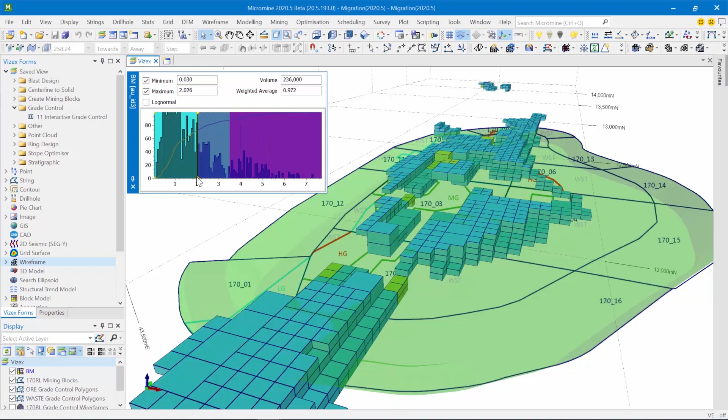Hello, my name is Andy, and today I'm pleased to give you an overview of some of the new features that are included in the interactive grade control tool, which is available for you to enjoy in Micromine 2020.5.

So the first thing I'd like to show you is the new forms and the improved workflow. Here's my grade control toolbar, and the first thing you may notice is that the setup is now split up into two options. So you have the setup for polygons and you have a dedicated setup for wireframes. So let's go through the setup for polygons.

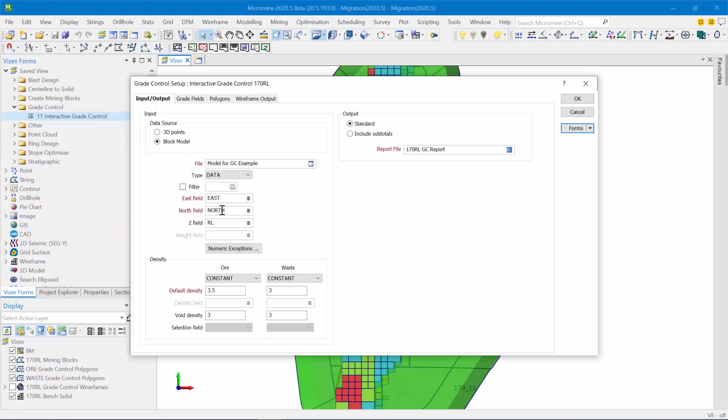I'm going to use a Micromine form set to save me some time so that I don't have to repopulate a lot of these settings. This is something that I'm sure a lot of Micromine users are used to utilizing. Let's proceed to the grade fields tab where the first new feature can be seen.

At the bottom of the grade fields tab, we have these options because now you can define a material bin set. A material bin set allows the user to define different materials. So imagine you have different material classifications and you want to be able to interrogate the block model and report on each one of those material bins. A material bin set allows you to define those material classifications and then use them in the interrogation process.

So here I've got three material bins. Sorry, I've got five material bins actually. My ore is broken down into low grade, medium grade, and high grade, and then I have waste. So my report will be broken down so that I get to see the reserves for each one of these materials.

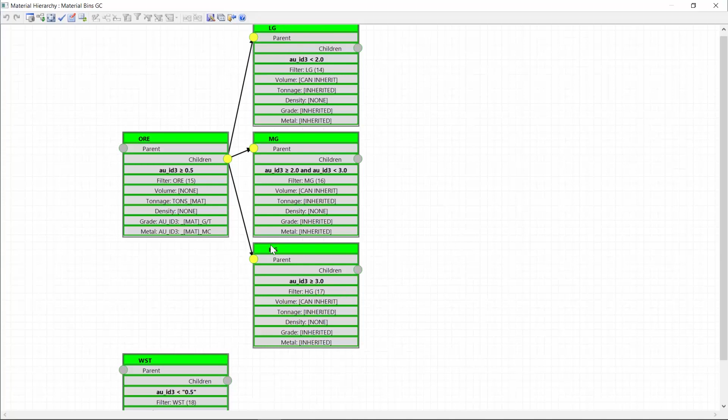Before I leave this window, I'll just show you that we've got some new options for writing additional attributes to the output wireframes, which is one of the primary outputs of this tool besides the report. So you have the ability to write a wireframe attribute for void, as well as the average density of the material, as well as labels and a series of other attributes.

So one of the things that I didn't mention before was that when you define a material bin set, Micromine will create wireframe attributes that correspond to the reserves of each material bin and write them to the output wireframes that are generated. And I'll show you that in a minute.

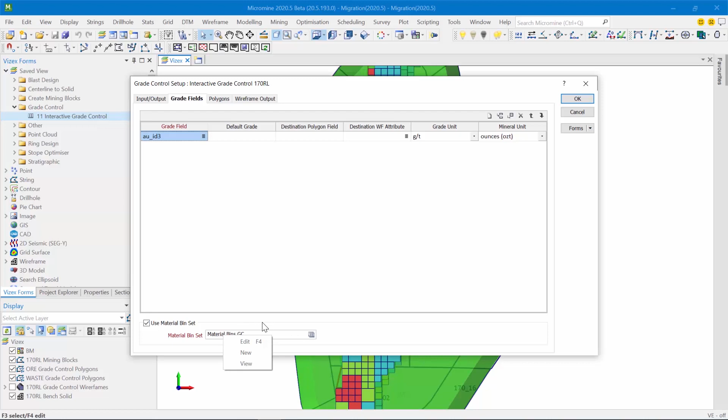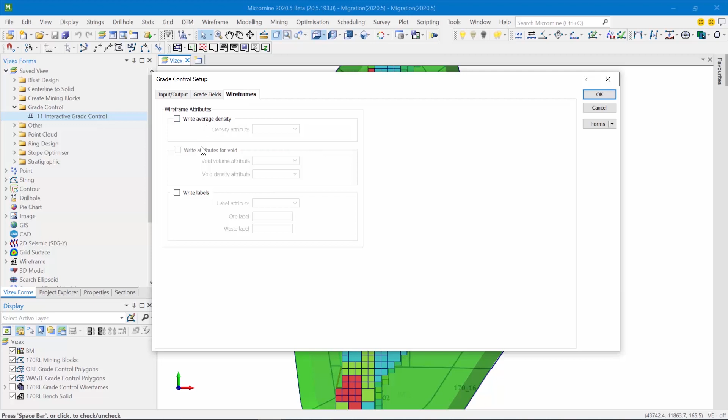So I'll close this form and give you a quick look at the wireframe setup. It looks predominantly the same as you can see. Down here in the grade fields tab, we have a material bin set, and we don't create wireframes in this process because the inputs are wireframes, but you have the ability to code those wireframes with additional properties from the run if you'd like to do that.

So now that I've given you a quick overview, let's go and set this up. So in my example, I've gone through and delineated my grade control dig blocks for all the mining blocks on the 170 bench. And as you can see, I've got my low grade, medium grade, and high grade control blocks. And in some cases, I've delineated the waste blocks as well. So I'm dealing with polygons in this case.

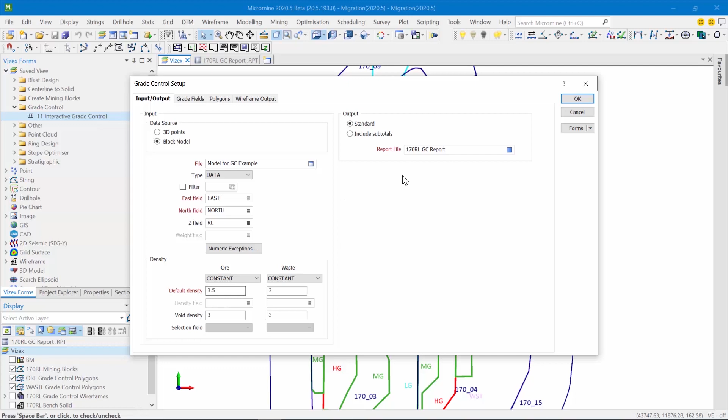So I typically go through to the polygons setup form, define my 3D points file or block model, as well as all my parameters for density, report file name, and so on. As you know, I've done this before because I loaded a form set. I've defined a material bin set for this case, and I've asked Micromine to generate some wireframes as one of the outputs. I'll click OK. I'm happy to overwrite that report file.

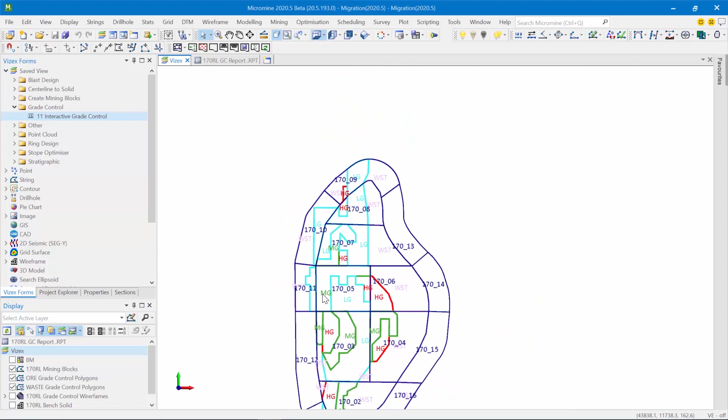Now typically you run a report for one mining block, but I'm going to show you how this can be used to quickly run a report for all the dig blocks or grade control blocks for all the mining blocks on a given bench, because this is a nice fast way of doing things. So I'll hide all my waste polygons or grade control blocks, however you want to call them, and I'm just going to hide my blast masters or mining blocks.

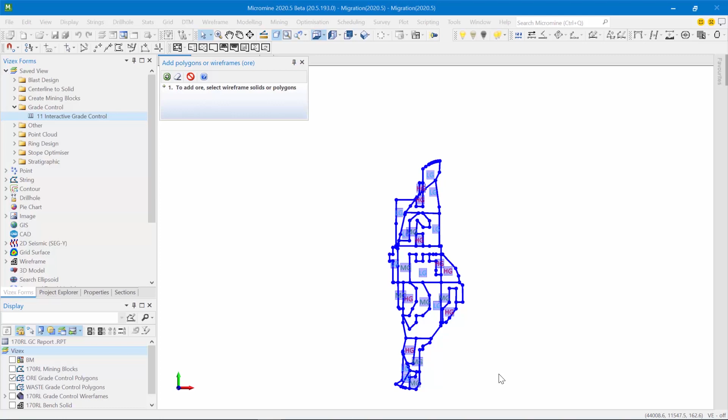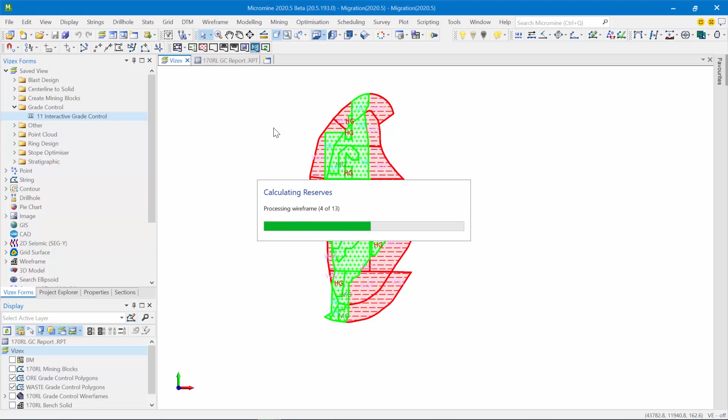So what I'm going to do now is tag all the ore. Select everything except your selection. Now I'm going to hide these guys and pull up the waste, and I'm going to tag all my waste. So now I've tagged all the ore and all the waste. And now I can just click on this generate report, and Micromine will interrogate all these polygons and generate a detailed report where things are broken down by material bins.

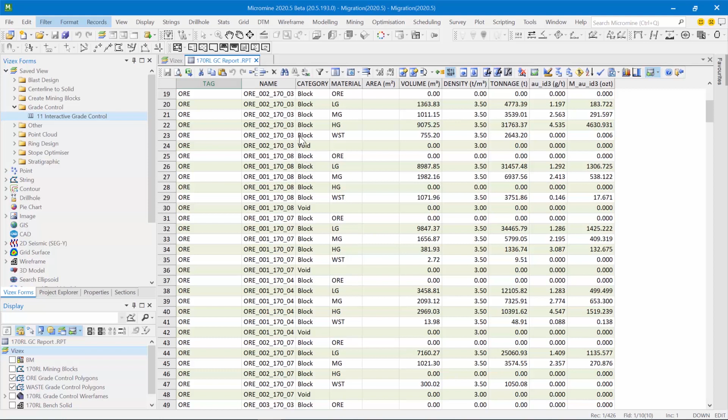So as you can see, for all these mining blocks, for each mining block, the function is reported on the reserves of each material bin. So there's the 170.08, 170.07. As I said before, you might not like to do this for all the mining blocks or all the dig blocks on a bench, but I just thought I'd show you this method because it's something that you can use to quickly run reports on everything on a given bench if you'd like.

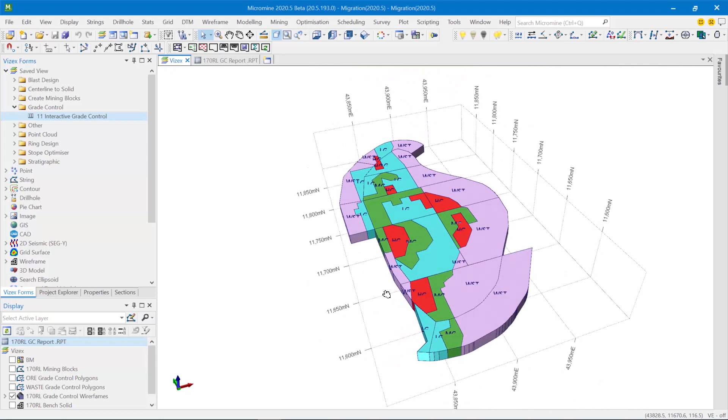Now, before I continue, let me show you the wireframes that Micromine can produce for each one of those polygons. So in this case, Micromine has gone through and generated these wireframes. And if I click on a wireframe, as part of the material set definition, you can see that Micromine has generated a series of wireframe attributes corresponding to the reserves that it calculated and written them onto each one of these wireframes. So this is really good because you can use these wireframes for various purposes such as scheduling or reconciliation or reinterrogation if you'd like to do something like that.

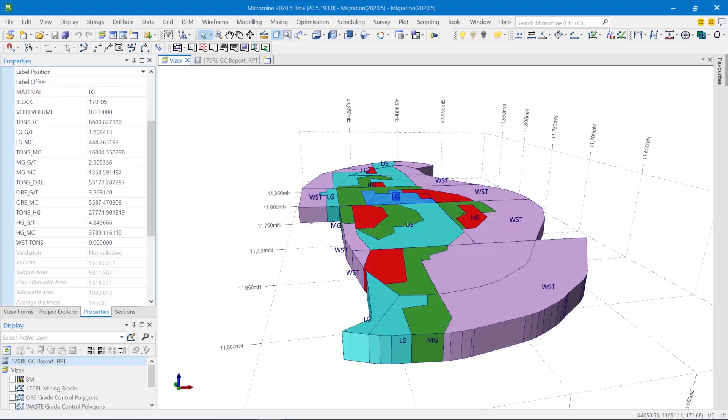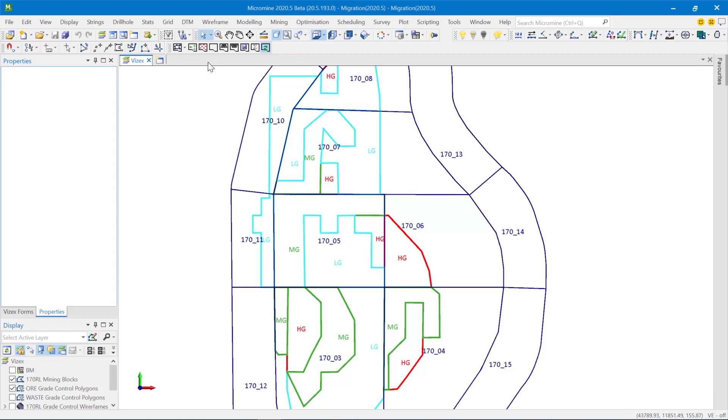So the next thing I'd like to show you is how you can use this auto update report. So right now it's enabled, and what that does is allows the report that's generated after each run to be dynamically updated as changes are made to the design. So let me demonstrate that. In this example, let's look at the 170.06 mining block where I've got a high grade control block within that mining block. So I'm going to tag that as ore, and I'm going to generate a report.

There's my report. Now let's say that I realized that this grade control block wasn't quite right, and in fact the high grade doesn't end there, but maybe ends there. Something funny like that. Now as you can see, the report is dynamically updated. Now let me just do a quick undo. Again, the report will be dynamically updated.

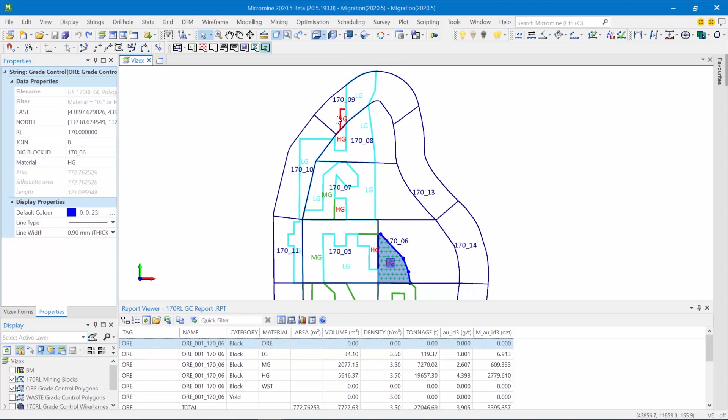So the benefit of that is that you can quickly see the implications of changes to the designs in your reserve reporting without having to go through and set things up again and tag things again. It's quite a neat feature, and it can even be used in blast design where you're designing your mining blocks and you want to see the implications of variations in the geometry of the mining block on the reserves in each mining block.

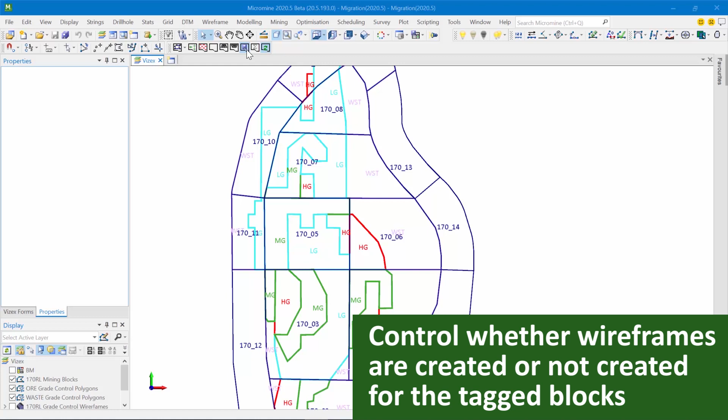So a couple of other things to show you. This toolbar over here allows you to control whether wireframes are created for the tagged blocks or whether they're not created. So sometimes you might just want to avoid creating these wireframes until you're completely happy with your grade control blocks, in which case you would have this disabled. But when it is enabled, wireframes will be produced as the report is generated.

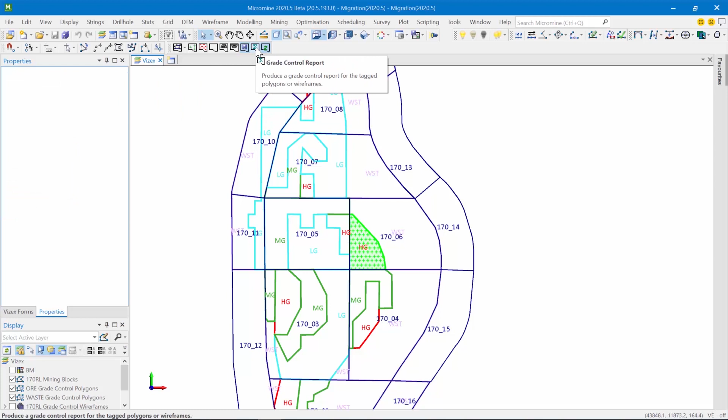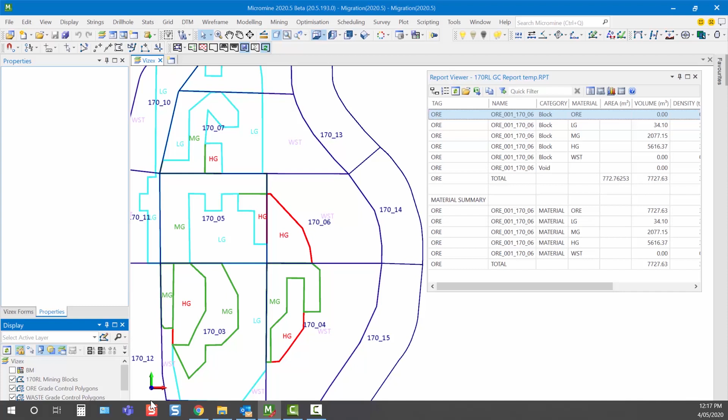So to show you that, I'll just tag this as ore, run the report. If you created the wireframes with the same names previously, Micromine will warn you. So in this case, I'm happy to overwrite. And Micromine generates a wireframe, which is that guy with the wireframe attributes. And the report has popped up. So this report can be moved around anywhere for those who like to work in different ways. Let's just remove that. And of course, you don't need to have grade control blocks to use this tool. You can use it in various ways.

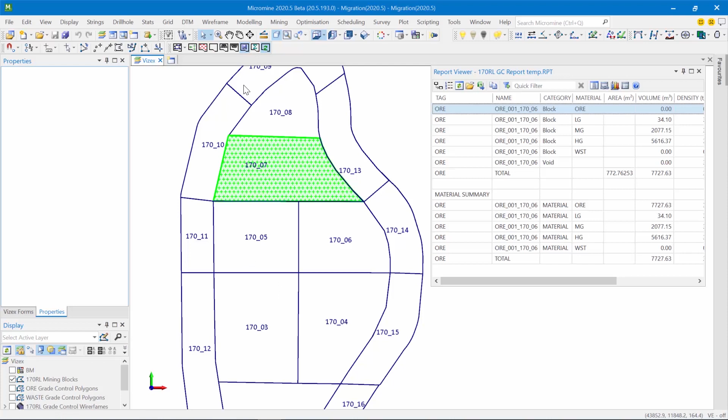So just to show you what I mean, let's just say I've gone through and generated my mining blocks for this bench. And now I want to try to get an idea of the reserves in each one of these mining blocks. Let's just look at 170_07. So what I'm going to do is I'm just going to tag that as ore. I don't want to create a wireframe. Oh, maybe I do actually. And I'll run the report. You'll see this thing will update after I tell it that yes, I want to overwrite any previously created wireframes with the same name. So now you can see that I didn't have any grade control blocks, but what I did was tag this mining block as an ore parcel and generate a report for it.

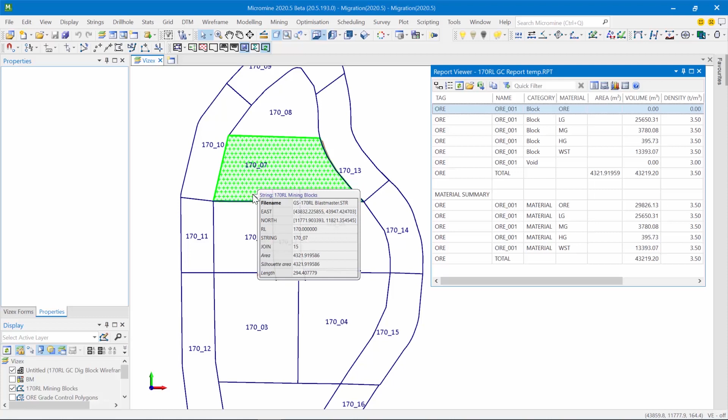Now I might find that I want to modify this mining block and split it into two to create a better division between the ore and the waste, for example. So that's possible. So this can be used as an interactive interrogation tool as well. It doesn't need to be used in a grade control context specifically. So yeah, and where's the wireframe? Let's show you the wireframe for it. So there's the wireframe, and it consists of the attributes associated to the calculated reserves.